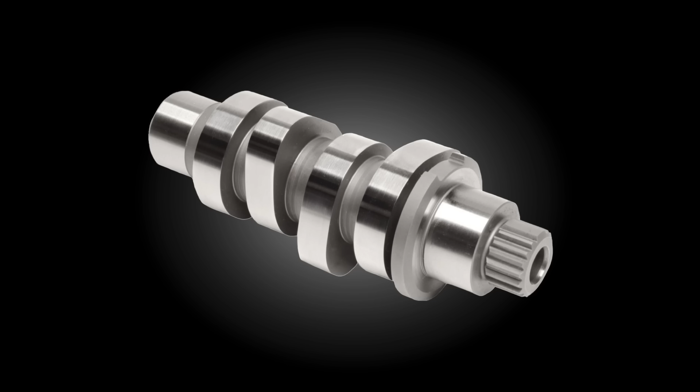So the next step is a stage 2. A stage 2 is the addition of a cam. There are a ton of choices for cams for the M8, and a ton of choices for cams on the twin cam engine. It all depends on where you want your power to come in—whether you want it at the mid-range or at the high end of the RPM range.

Generally speaking, a cam or stage 2 will yield about a 20% gain over your stock numbers. Remember, when we started this hypothetical engine, it had 90 horsepower and 90 foot-pounds of torque. So generally speaking, a 20% gain would put you somewhere around 110 horsepower and 110 foot-pounds of torque. Again, this is a hypothetical engine with hypothetical numbers, but this is the general rule for a stage 1 and a stage 2.

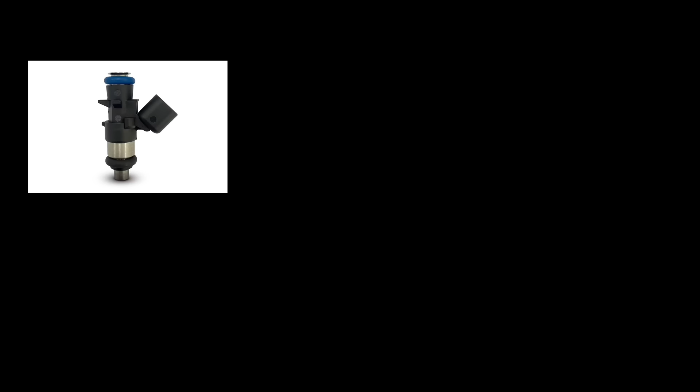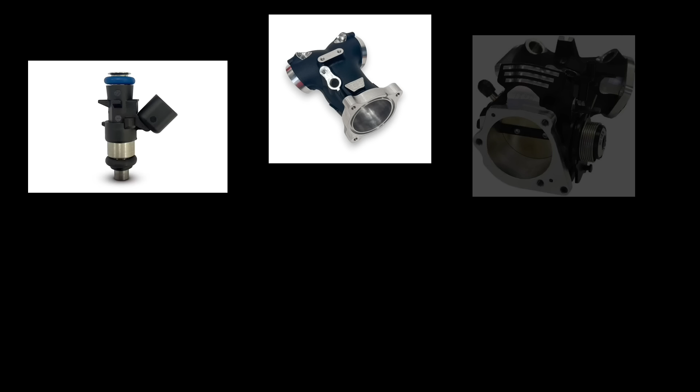Of course, there are exceptions to every rule. You could put larger injectors in the bike. You could put a different, larger intake manifold on it. You could put a larger throttle body on the bike. You could have it dyno tuned. There's a whole bunch of different things you could try to increase that 'quote' 20% 'unquote' margin. But you can still only put a gallon of water in a gallon jug.

Which leads us to the next thing: big bore kits. That's a whole other subject and a whole other rabbit hole to go down into. So now let's talk about cams—let's see where this rabbit hole can take us.

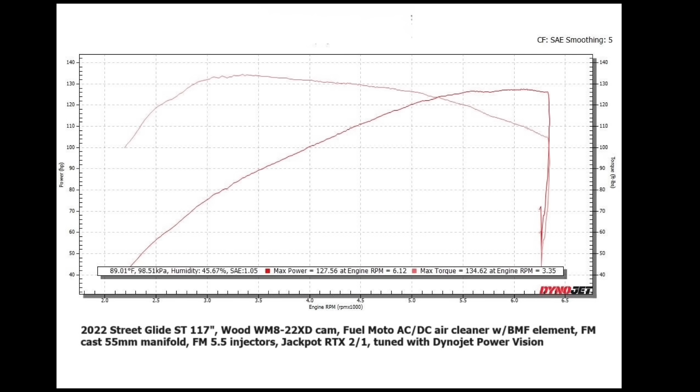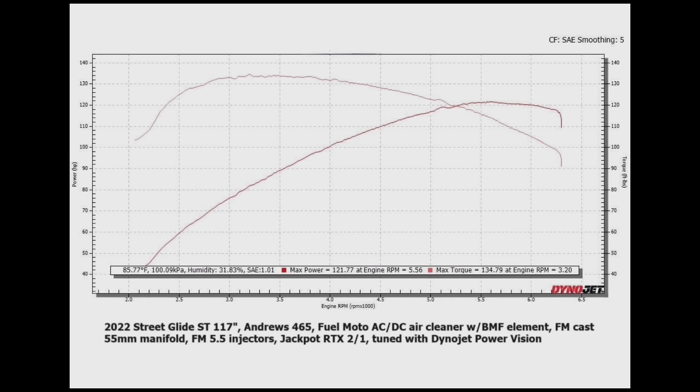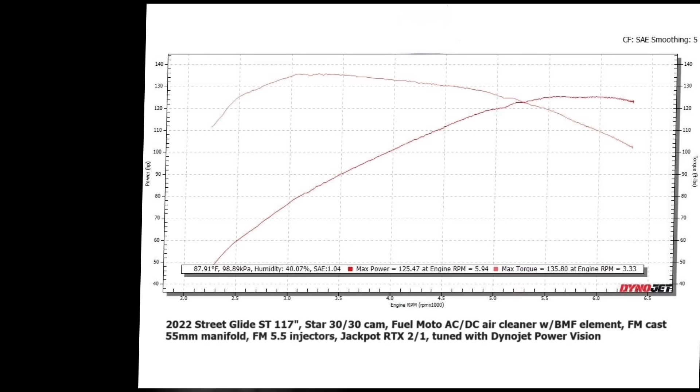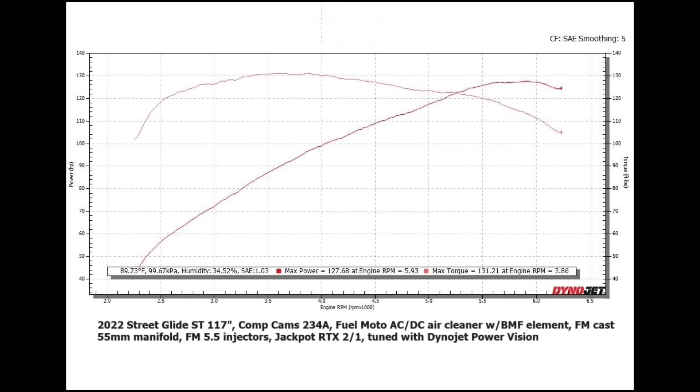Coming up here we have the Andrews 465. It produced 121 horsepower and 134 foot-pounds of torque. Up next is the Star 30/30—we hear a lot of people talk about this cam. Horsepower 125 and torque at 135. Competition Cams makes a cam called the 234, which produced 127 horsepower and 131 foot-pounds of torque.

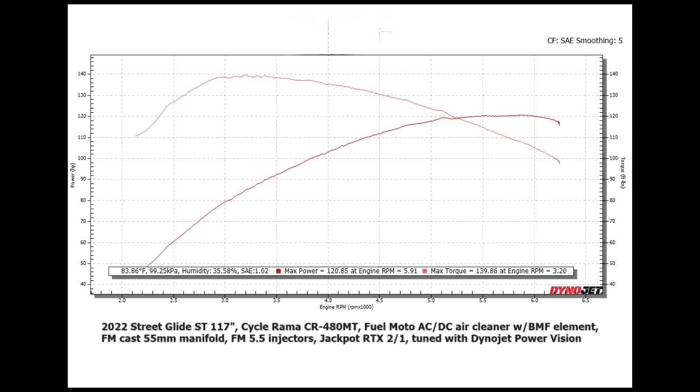Okay, now we have the CycleRama cam, which is our shop favorite cam to use. This one is the CR480 MT. It produced 120 horsepower and 139 foot-pounds of torque. This particular cam produced the most torque of any cam in the test. So if you're looking for torque, the CR480 MT is going to be your choice.

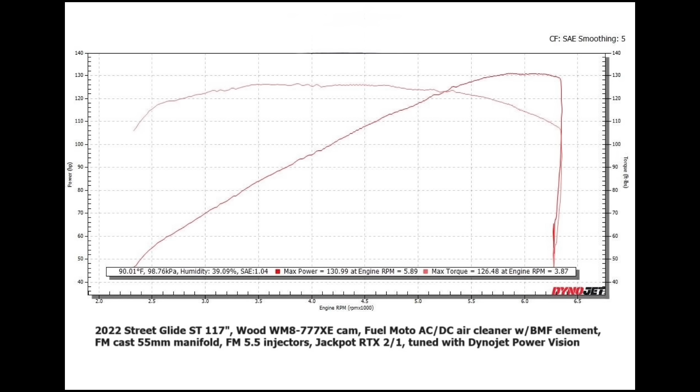Okay, up next is another Wood cam. This is the 777XE. It produced the most horsepower of all the cams in this test at 130 horsepower. The torque is at 126, so there's a trade-off. You guys watch out for that.

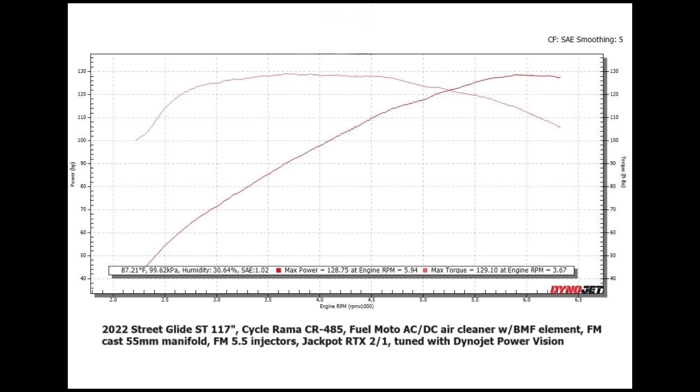Okay, this one is another cam, the third one in the test from CycleRama. It's the CR485. It produced 128 horsepower and 129 foot-pounds of torque. Good all-around cam. On to the last two cams of this test.

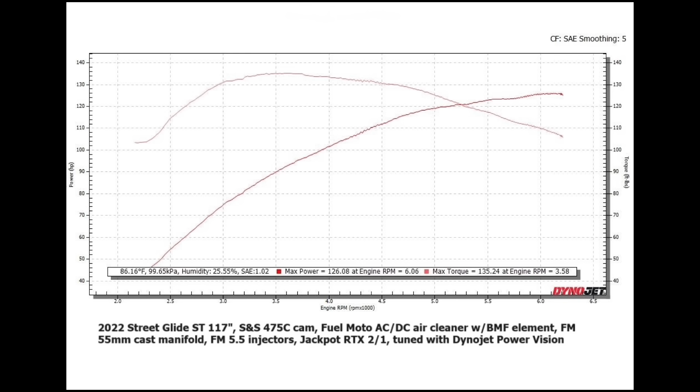This one is the S&S 475. It produced 126 horsepower and 135 foot-pounds of torque.

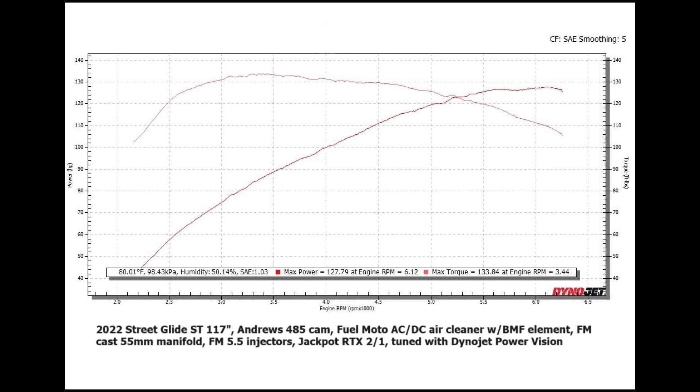And the last cam in this test is the Andrews 485. It produced 127 horsepower and 133 foot-pounds of torque. This one is going to be a choice for the guy that wants the best of both worlds. You can't have max of each. You can have a medium level of both, and the Andrews cam does a real good job at that.

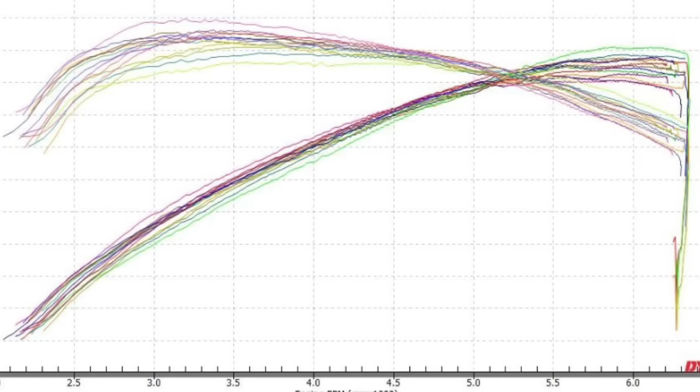Okay, so one thing I did want everybody to notice is, when all of these dyno runs are laid on top of one another, there are some differences, but there's nothing really major between any of them. Some of them offer great torque down low. Some of them offer great horsepower up high, but you can't have both in one cam.

I've always been a torque guy. I like my torque to come in real low. Horsepower to me, if you're a racer, drag racer guy, and you like to ride wide open, that's where you're going to have the power way up high on the RPM range. Just depends on who you are and what you want. But I just want you to notice in this graph, all this talk about how this particular cam is so much better than this particular cam, it's really not.

They're all about the same. It just depends on who you like. If you're a football fan, you like the Dallas Cowboys. Some people like the Denver Broncos. Some people like the Tampa Bay Buccaneers. They're all football teams. They all play football. So just pick the one that fits your particular need.

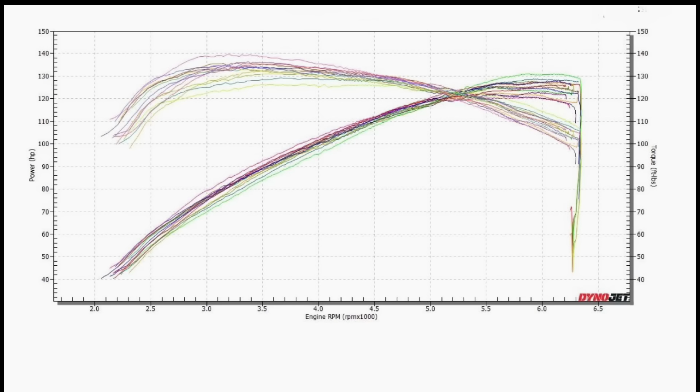Most people need torque down low. Most people don't ride wide open. So after all that, it boils down to the best torque number in this test was the CycleRama CR480 MT at 139 foot-pounds of torque on this 117 test.

Okay, and the best horsepower overall out of all 13 cams was the Woods 777XE at 130 horsepower. So if you're looking for the most horsepower you can find for your 117 or 114 or 107, the Woods 777 cam is going to give you the most horsepower. Some people want horsepower, some people want torque.

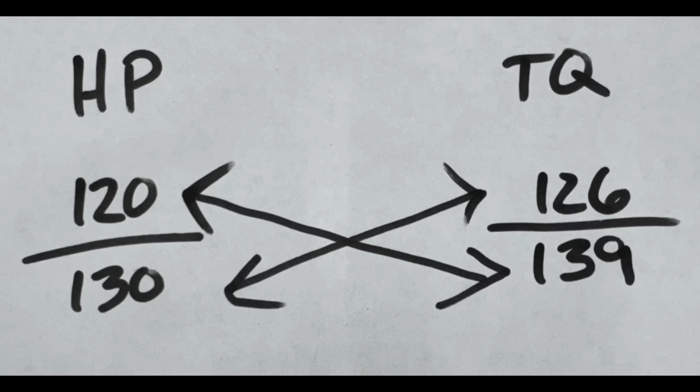Okay, so from this particular test, we can take something away from it. If you want high horsepower, you get low torque. If you want high torque, you get low horsepower. Depends on what you want.

If you want a good all-around cam, there's good choices. Actually, there's two of them: the Woods 22XD and the Andrews 485. Both those cams are about identical at 127 horsepower. The Woods 22XD is 134 torque. The Andrews is 133 torque. Tit for tat.

And that's going to do it for this particular video and this cam test and explanation on how engines are designed and what to expect with the cam and all that kind of stuff.